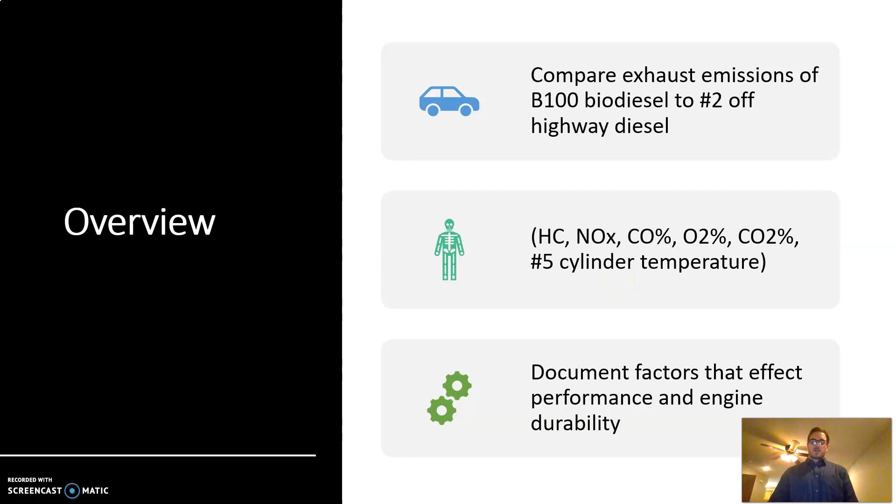The research question is: does running biodiesel reduce exhaust gas emissions? So step one in this project is to understand the difference between diesel and biodiesel. This is a typical diesel molecule with 14 carbons and 30 hydrogens.

Biodiesel is very similar with 17 carbons, 34 hydrogens, and biodiesel contains - this is important to know - 11 to 12% more oxygen than diesel. Also, a big difference between diesel and biodiesel is that biodiesel is composed of organic fatty acids derived from animal fat and vegetable oils.

That does play into a factor on how it will burn. It is a slightly bigger molecule than diesel, and it is known to gel up quicker as the cloud point, flash point, and pour point are higher than diesel. So it gets thicker at a higher temperature compared to diesel, which can affect engines, and it should only be run in mechanical fuel injected engines if you're using a high amount.

Most manufacturers will let you run up to B20 in common rail fuel injected engines. Older engines that were mechanical could run pretty much any blend. What we're using in the test is a mechanically fuel injected engine.

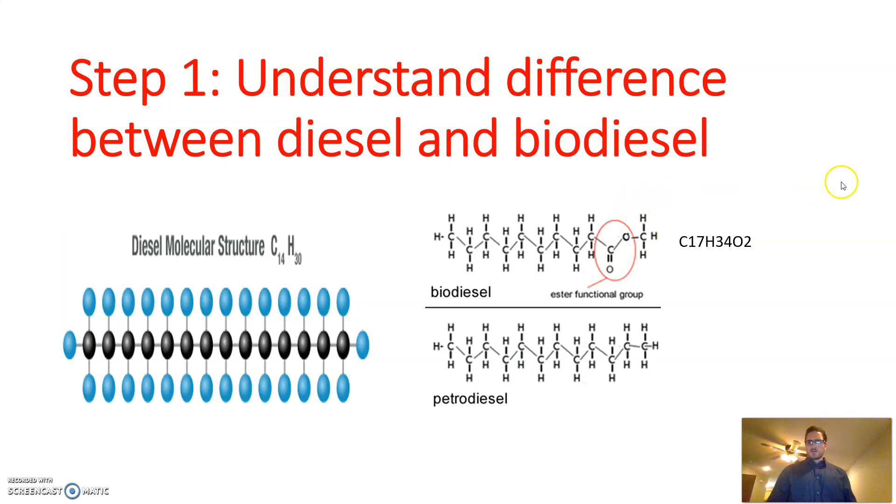Keep in mind the higher oxygen content in biodiesel could show leaner readings with an exhaust gas analyzer, and it could burn a little bit differently than diesel. So we'll see that in our readings.

Step two is to obtain the diesel fuel and the biodiesel. The biodiesel was made by Pitt State several years ago, so note that the biodiesel is old - it's probably about 5 years old, made quite a while back.

The diesel fuel is number 2 off-highway diesel fuel, also known as red diesel, and we used that from the diesel lab. We compared it using a Cummins B5.9 engine, which has a mechanical fuel injection system on it. We ran the number 2 diesel and the biodiesel right after each other to see the results.

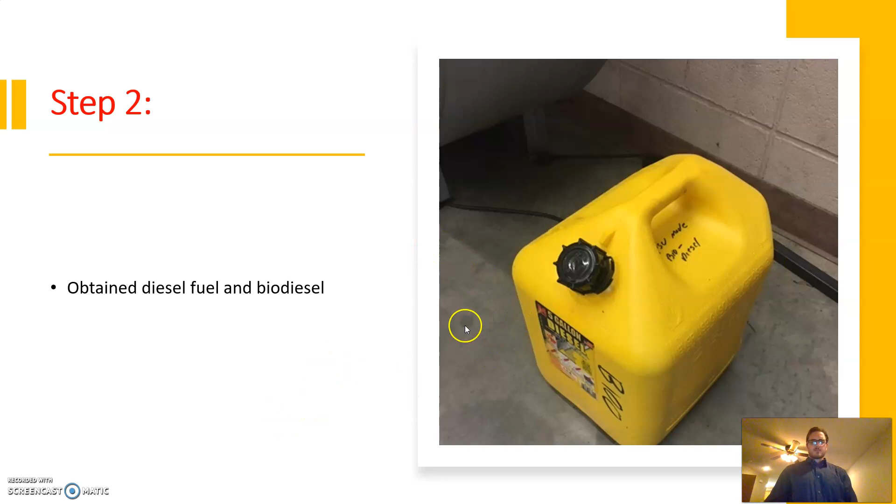Step 3: preparing the Cummins engine to run. We connected the battery, checked the oil and coolant to make sure it could be run, and it did start right up on both fuels. Initially the B100 ran a little rough, but then it smoothed out.

We did let the engine warm up so we could get as accurate readings as possible. Don't forget, as I mentioned, this engine's exhaust manifold only got to about 135 degrees Fahrenheit, which can show somewhat different readings.

And then there's our exhaust gas analyzer, and this is the engine. Notice that there's no load or anything tied to the end, so that also is a factor.

We did connect the exhaust gas analyzer once it was warmed up, which is a Snap-on model. I don't specifically know what year this is. However, it can read a lot of petroleum fuels such as gasoline and diesel, and it can read methanol and ethanol too. So it was an accurate tool to use, especially compared to other studies that have done the same thing.

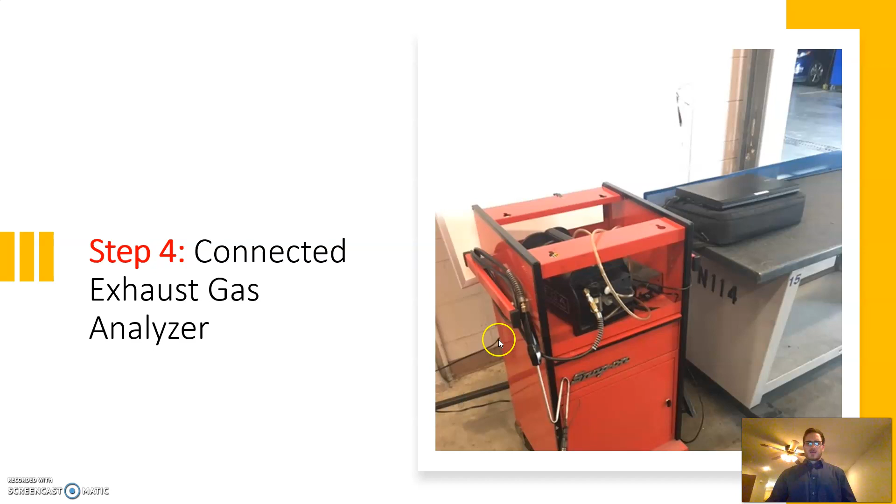Step 5: we obtained readings from diesel fuel, and here are our readings. Quick to notice that the oxygen content was high, because the probe at the end of the exhaust was diluted with outside air. The probe is exposed to the atmosphere, to the oxygen in the automotive lab, so that can make that look high. It can also cause the carbon monoxide reading to go down, or even not read at all. In this case, it was just very small.

The carbon dioxide reading was pretty low, which indicates inefficient combustion. So if the engine was running lean, or wasn't hot enough, there could be pretty inefficient burning in that engine. For example, the flash point of diesel is around 55 degrees Celsius, and the flash point of biodiesel is around 130 degrees Celsius. So with the exhaust gas temperature at 135 degrees, that fuel might not be burning completely or very efficiently at all. So we'll watch this video just to see a short test.

And like you saw here, the temperature wasn't very accurate with the probe, so we used an infrared temp gun to take a reading of the exhaust manifold at number 5 cylinder, just as a baseline.

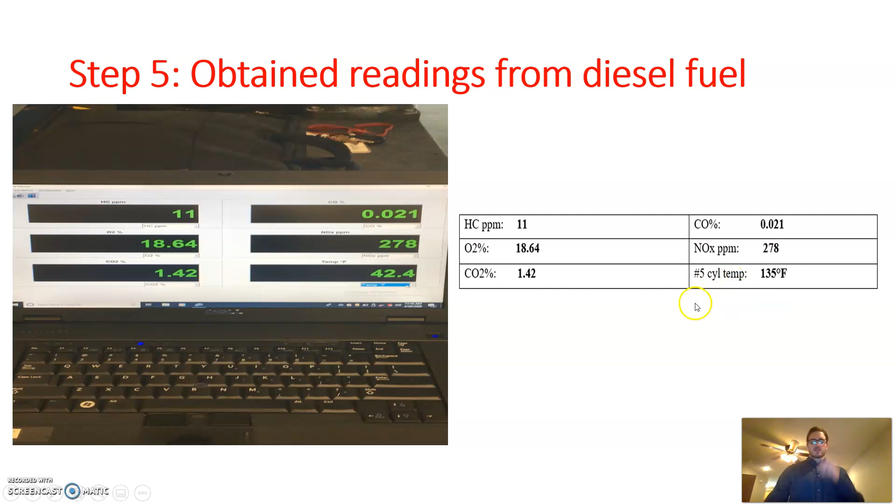We did the exact same test on biodiesel.

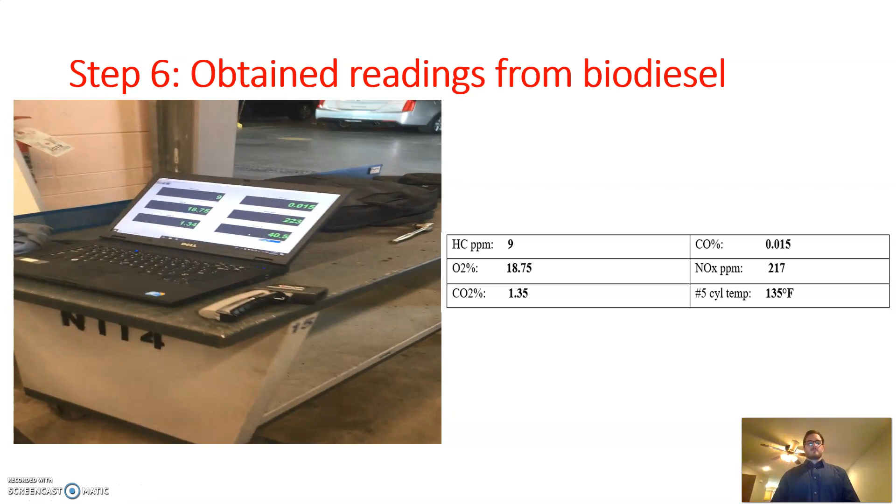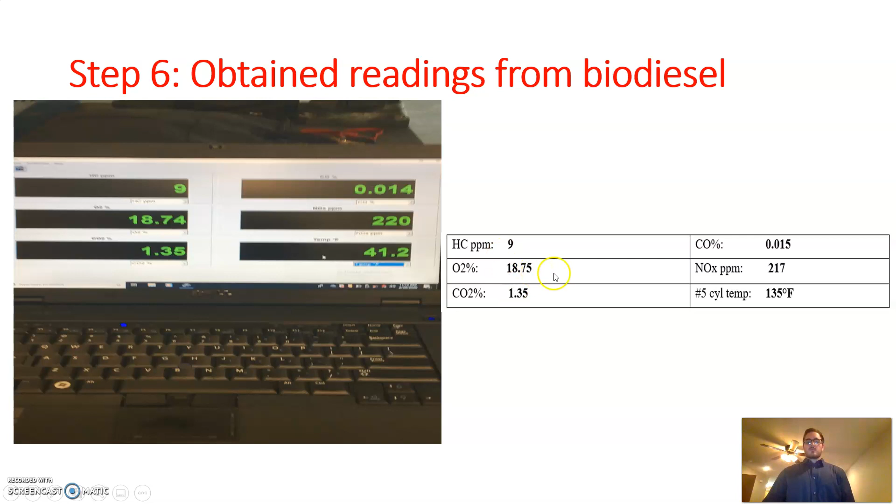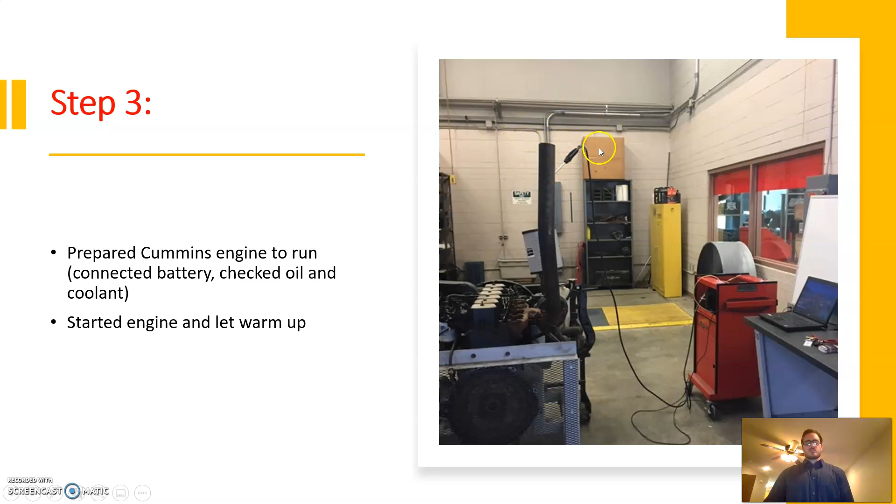Once again, you did see a high oxygen content, which made the carbon monoxide reading go down because you're getting an artificially lean condition, which is what the exhaust gas analyzer is reading. It could be that the engine is actually running lean because it is not a modern computer-controlled fuel injection system, it's mechanically fuel injected. There's just so much air around this exhaust pipe that the probe is picking that up as well, all the oxygen out here. So keep that in mind as well.

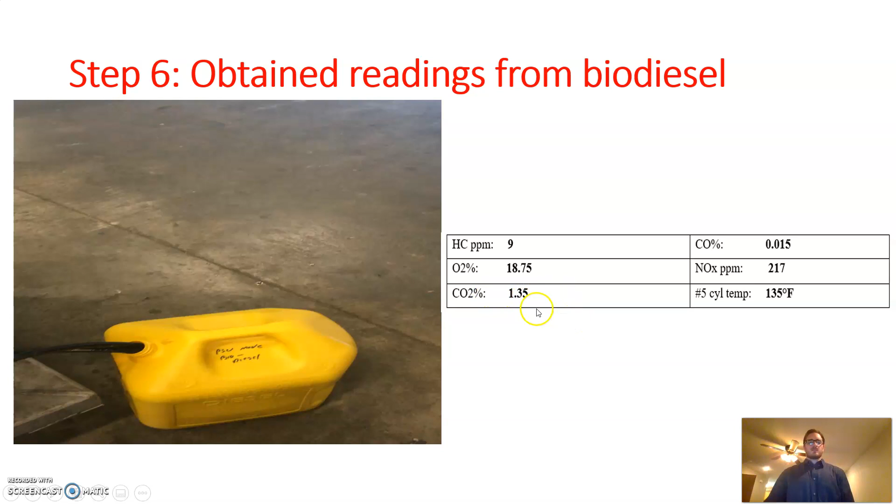This indicated, once again, incomplete combustion because of a low temperature. I did attempt to increase the engine temp by covering the radiator, but it wouldn't go above 135 once again. I also raised the engine RPM.

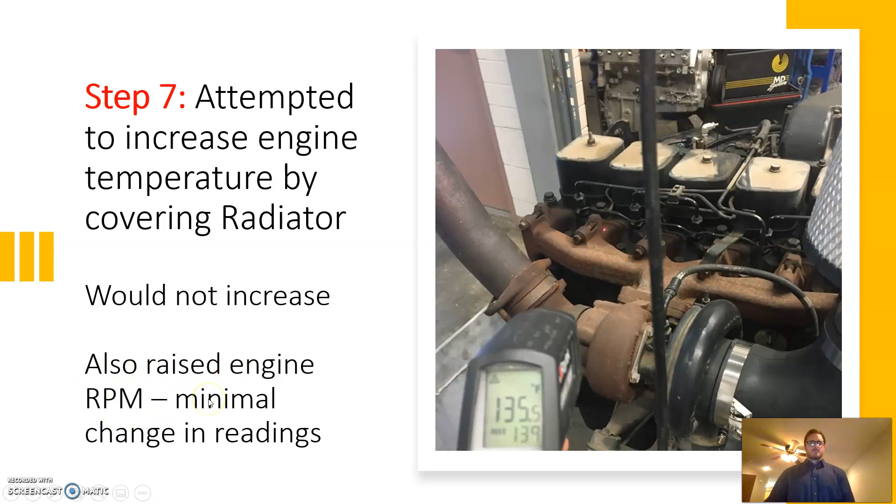However, there were minimal changes in that. To verify that the gas analyzer readings were correct, I used a Nissan Titan. I warmed it up, drove it, got it up to operating temperature. It also uses a Cummins diesel engine. For example, the carbon dioxide output on that engine was about 3%, which is very comparable to our test. So we know that the readings we were getting were similar to a running modern day engine.

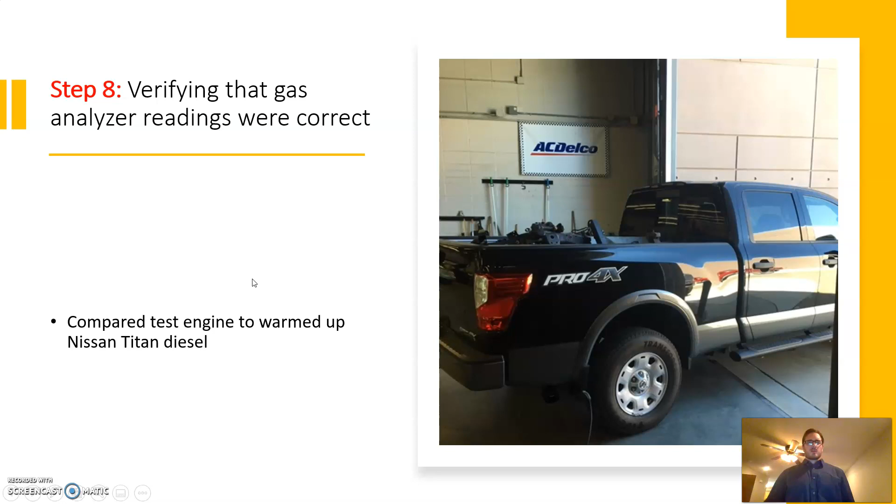On top of that, I found about 5 additional studies with similar results, but here's 3 of them. In this study, at 5 Nm load, their hydrocarbon emissions output was about 12 ppm. In my test with the biodiesel, it was about 9 ppm. So I'm happy with that - that's pretty close, remember we were at 0 load and they were at 5.

Carbon dioxide output from our biodiesel at 0% load, we had a 1.35% emission reading. On this other study, their CO2 emission reading was about 3% with B80, 80% biodiesel, which is very close. This was at a 25% load, so most likely that's going to go down if they reduce the load.

So I'm also happy with that, it's pretty close. And then excess oxygen on the biodiesel test - in my test in the lab we had 18.75% oxygen, and this test had about 17.5% with biodiesel. They didn't tell us the blend, but I'm happy with that too because it's close, indicating we're going to see the same results when we had a similar situation happening.

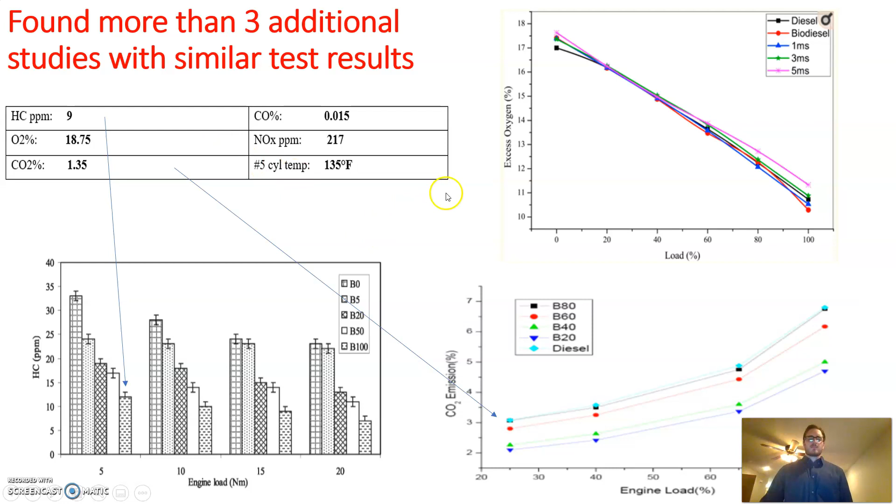Here's some additional findings. These basically indicate that my test is replicable and has pretty consistent results with these other 3 tests, because there's more out there - there's at least 5 that I looked at that had similar results.

So our research question overall was: did running biodiesel in an engine reduce exhaust gas emissions? As it's kind of hard to tell from our test, in the lab, it did. Especially hydrocarbons were reduced from 11 to 9 with the B100 blend. Carbon dioxide output was reduced to 1.35%, and carbon monoxide was reduced, and so was oxides of nitrogen, parts per million.

Interestingly enough, biodiesel is not claimed to reduce oxides of nitrogen. However, these engines weren't getting very hot, so this reading might be a little off. Also remember, when engines do get really hot, combustion temperatures will increase the oxides of nitrogen. So if we were driving this on a normal vehicle, we might see that this isn't the case. But we do use EGR in most modern day engines, typically all modern diesel engines, to reduce oxides of nitrogen.

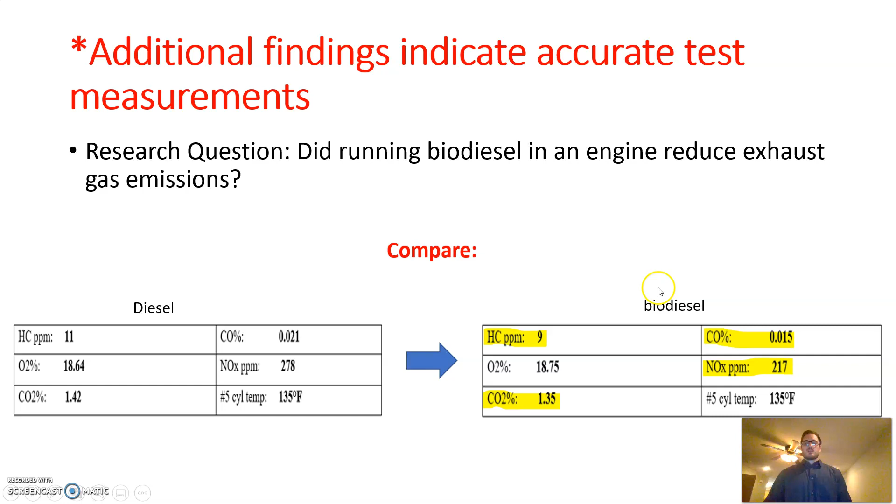Test variables, remember - we weren't driving it, there wasn't a load. The temperature wouldn't climb that much, and we're not really simulating a driving condition, so some of these readings were a little bit different.

However, since these readings in a lab environment were basically replicated with other studies and we found the same thing, we can ensure that these readings are correct for this environment. So we can trust them pretty much.

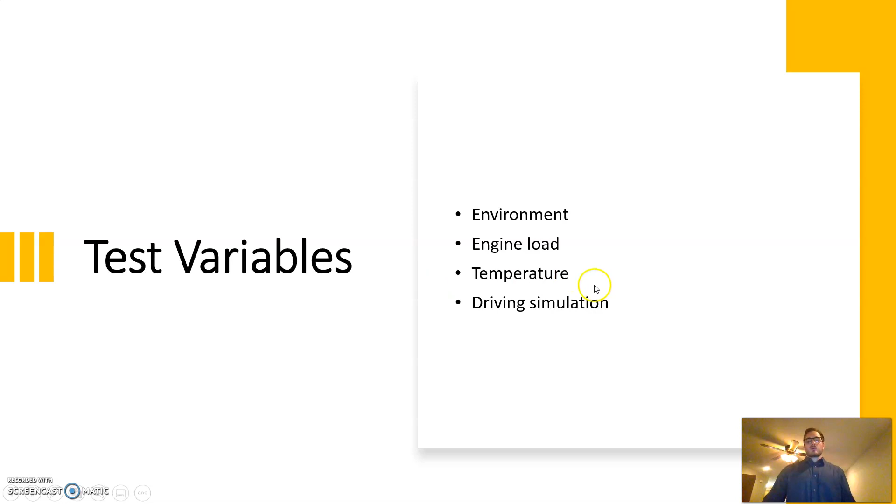Conclusion: they did conclude that all of these emissions were slightly reduced by using biodiesel, but honestly the test is a little bit inconclusive because further testing would be needed to really claim that biodiesel for sure reduces exhaust gas emissions and greenhouse gases with this test. There have been other tests that have claimed that they do reduce emissions, however, this test did not specifically claim that.